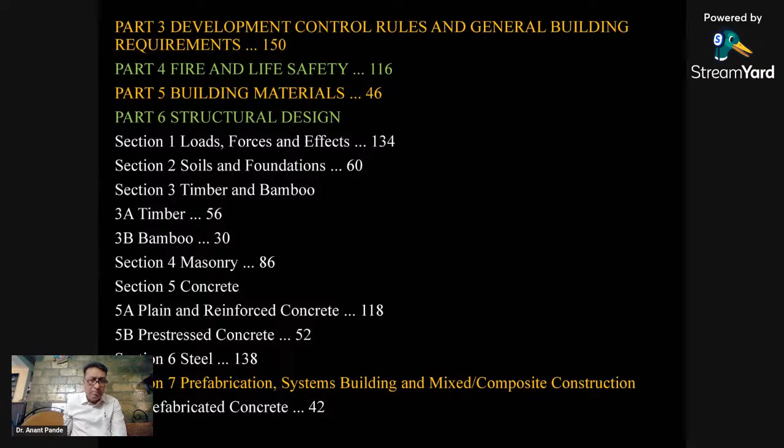So I'm just going through details. The next volume is volume 2, explanatory note for users of the code. This is what we are supposed to go into details of. Then only we can understand the codes very well. Construction management practices and safety, building services.

Services - probably you will have to refer to this: lighting, ventilation. So in one of the presentations, I made a presentation on sun path analysis. Probably it is not covered in any other code, though it is more related to architecture. But every engineer must understand what is sun path analysis, what is a green building.

All this has been covered in the National Building Code. Plumbing services, etc. - the details are available in National Building Code. Landscape development is also available. Part 11 is approach to sustainability. This is what we are focusing more on, and those who are interested, I'll request them to go into details of this part 11.

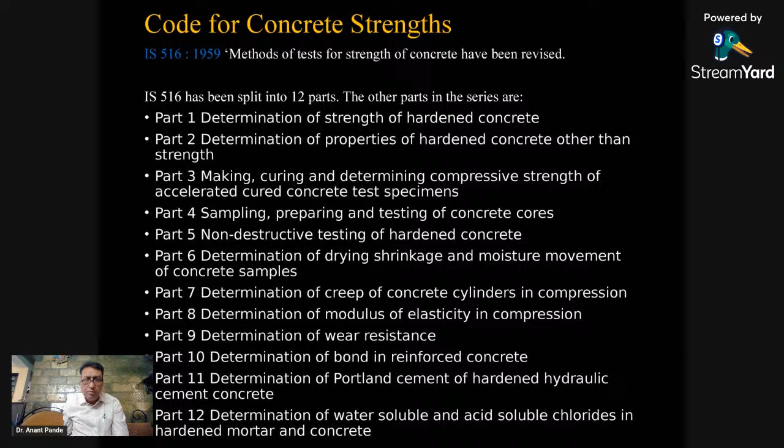So the original codes 13311, they are replaced by IS 516, that is part 5, section 1 to 4. Non-destructive testing provisions have been incorporated, but they have been modified. So those who are following 13311 part 1 and 2, there are great changes. Details on the frequencies of transducers have been updated. So again, if you are following the old codes, you will be put to trouble.

Then more details are included on surface preparation. Earlier the surface preparation was not very specific, though it was mentioned, but now they have brought in a better kind of option for surface preparation. Velocity criteria have also been revised, and more details have been given on the effect of various factors on pulse velocity measurements.

Those who have followed the earlier code - many times it so happened that your rebound hammer used to give good results, but your pulse velocity was not giving proper results. So if you follow IS 516 part 5, then you will understand this in a better way.

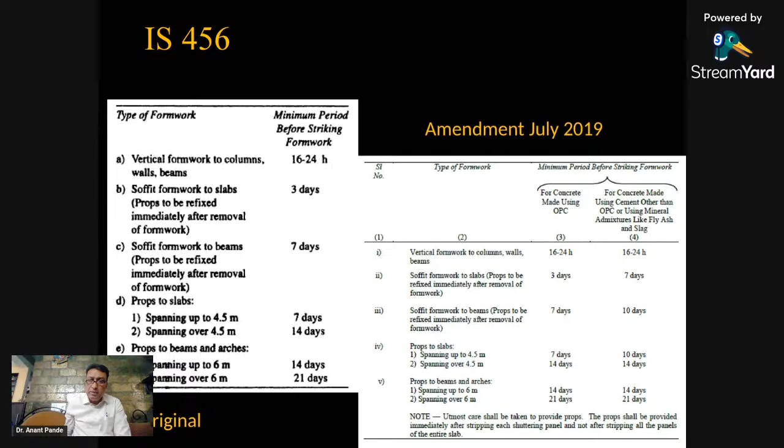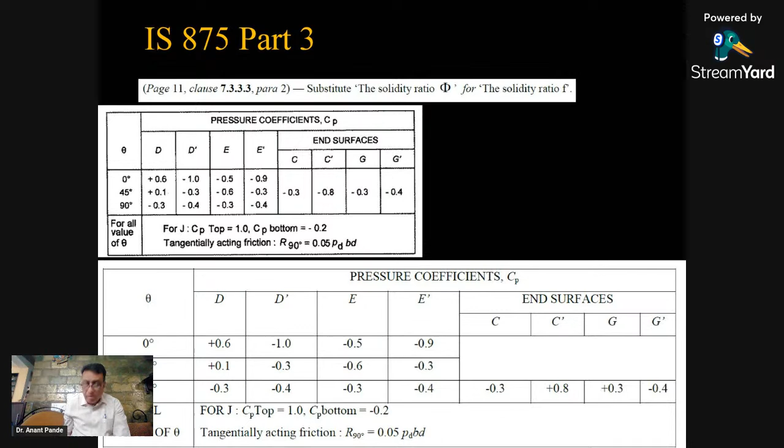So that's why I'm focusing on these amendments, only to make you aware that if you are following a particular code's older version, your calculations may prove to be wrong. This is a very classical example, IS 875 part 3, dynamic wind effects. If you have referred or used this any time, the formula in the earlier code, even as late as 2016, it has come.

You look at that, under root it is 1 plus g square. And of course I was a project guide, and there was a difficulty for my student. He said, Sir, for 1 plus g square, I have taken 9.8 as g, because g is 9.8 meters per second square. I said there must be some mistake. Why did I realize this? Because they have explained all symbols there itself, but this g was not explained.

So I went for the purchase of this code. At that time, I think this was not available online free of cost. And then in the amendment, I saw it is 1 plus phi square, and not 1 plus g square. Page 47, clause 10.2, line 28. And phi is a totally different factor to account for second order turbulence intensity, it has to be calculated differently. And if you are using 9.8 meters per second square instead of this factor, your calculations are going to be absolutely wrong.

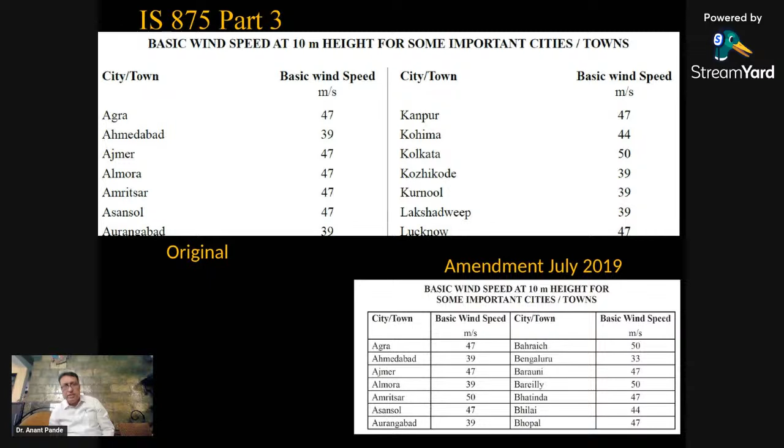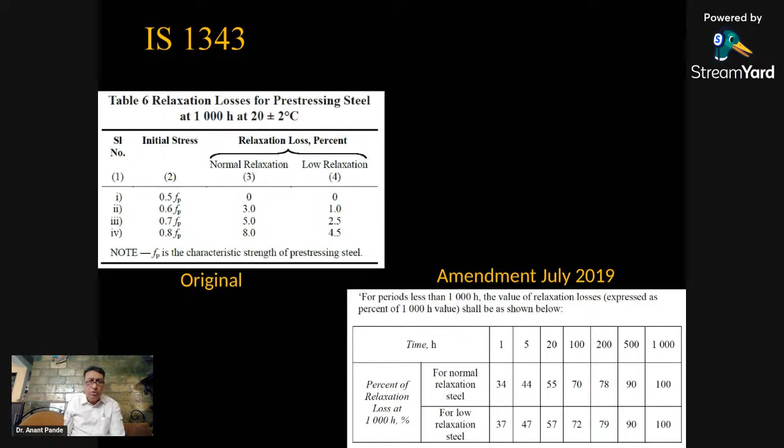And AW, which might have been calculated using earlier code, there is a great mistake. So focusing on all this, you have to remember that you have to follow amendments for every code, and you can get amendments easily, absolutely no issues.

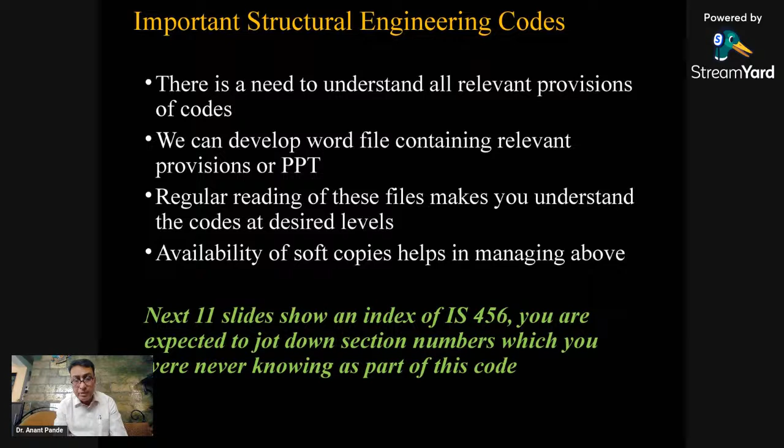Now, if I ask you, everybody knows IS 456. I don't have any doubt that you know IS 456. But while discussing with students and my colleagues many times, I realized that probably many of them were not aware about what are the contents of IS 456. Contents related to structural design, yes, everybody knows. But contents other than structural design are not known to many of these people. This was my observation. Probably your observation may be different.

See, IS 456, why I'm showing this is a simple thing. I want everybody, once you go for the latest version of the code or amendments, you should look at the index first. So materials, workmanship, inspection, and testing, material, cement, mineral admixture, aggregates, water, everything is available in 456.

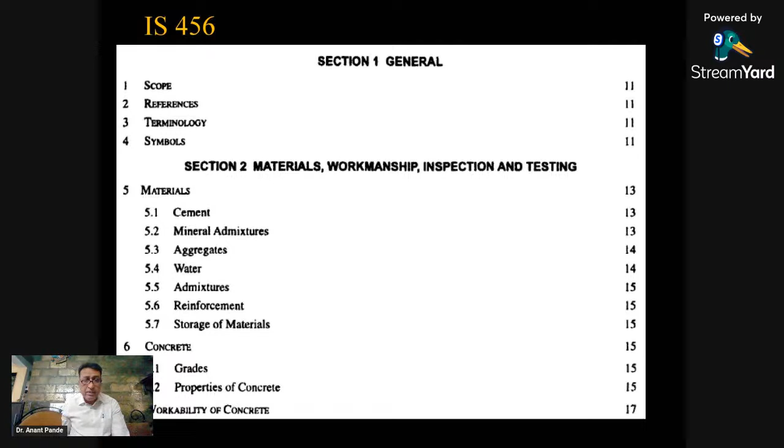Maybe, probably you will have to refer specific codes whenever it comes while directly using properties of concrete, workability of concrete, that is given in 456. Durability of concrete, requirements for durability, that is also given. Mix proportioning, of course, you will get basic information in 456 itself.

Production of concrete, quality assurance measures, batching, mixing, form work. Now, form work, that is also included in IS 456. These are general requirements. I'll be covering specific code related to form work, but even these are mentioned. Assembly of reinforcement, transportation, placing, compaction, and curing, etc. This is also given in IS 456.

Construction joints, cold joints, curing, supervision, concrete under special conditions, underwater concreting. So many times it so happens that when you are required, 456 is handy. But once you look at 456, you can get into touch with other relevant codes, because this code also mentions other codes, so you can get other codes also where underwater concreting, how it can be done.

Sampling strength of designed concrete mix, even that is mentioned over here. Inspection and testing of structure, of course, this needs revision because a new code has come, so that will be incorporated. But there is a mention about the standard in 456. You have to refer for the latest version of that code.

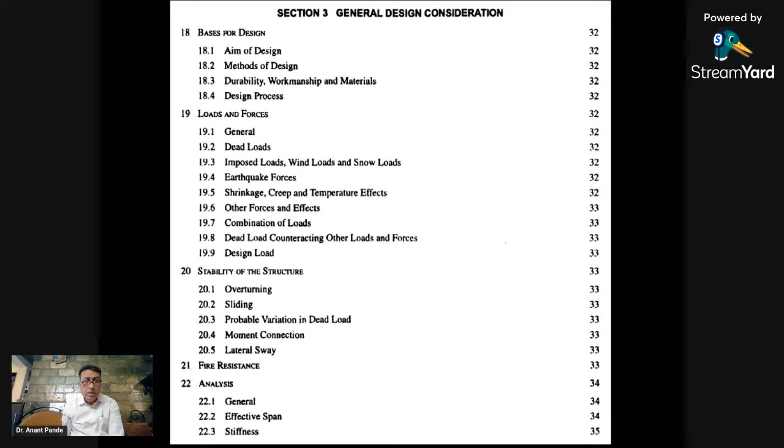This probably everybody knows, that is general design considerations. Most of the students and faculty, they follow this part. Stability of structures, that is also here. Fire resistance is there. Loads and forces, they are also given. A brief introduction is always there.

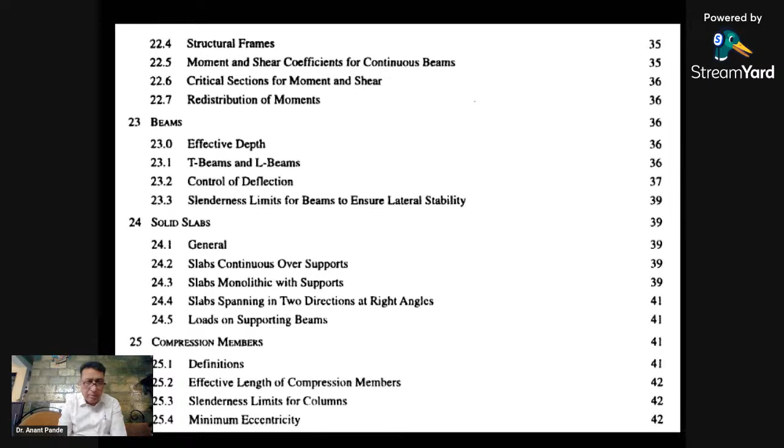Solid slabs, compression members, most of you might have referred to. Special design requirements for structural members and systems. Now, concrete corbels, deep beams, ribbed hollow block or voided slab, these are also given in 456. What you are supposed to do is just refer this, and whichever code is mentioned over there, you try to follow that code. That will help you in understanding these things. Flat slab, of course, those who design flat slab, it covers in this. Walls is also there.

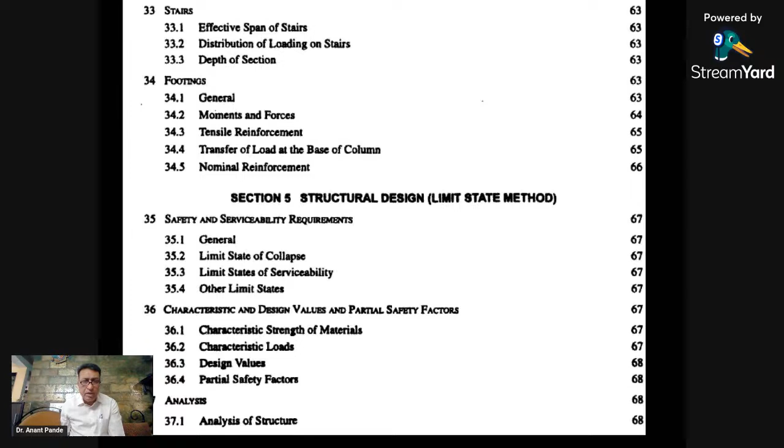Look at section 5, limit state method, that most of you who are teaching structural design or who have learned, they have followed this. So I'll not be speaking much on this, but I am just showing you this is the importance of the index of any code. So if you read the index carefully, you will get a lot of information.

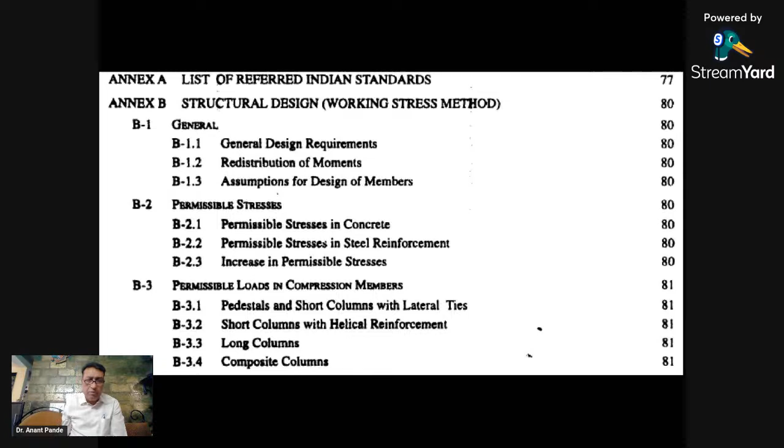So I'm just showing you calculation of deflection. Everything is given in 456. Now, foreword reading is also very important. See, any new version of code has come, you will have to refer to the foreword.

Unfortunately, what has happened is yesterday I uploaded my presentation, then in the evening I modified it for bringing some text. But since that was uploaded, it is opening the old one.

Remember, I want everyone sitting over here. I'm asking you to read all forewords because you will get a lot of information from the foreword. There is a code 3466. You can note down IS 3466. You can download that code and just look at foreword 0.2 section. It is part zero point 0.2 of IS 3466. Of course, it will be there in my presentation also. So we'll be focusing on that.

So unless you read the code carefully... I'll give you two or three minutes.

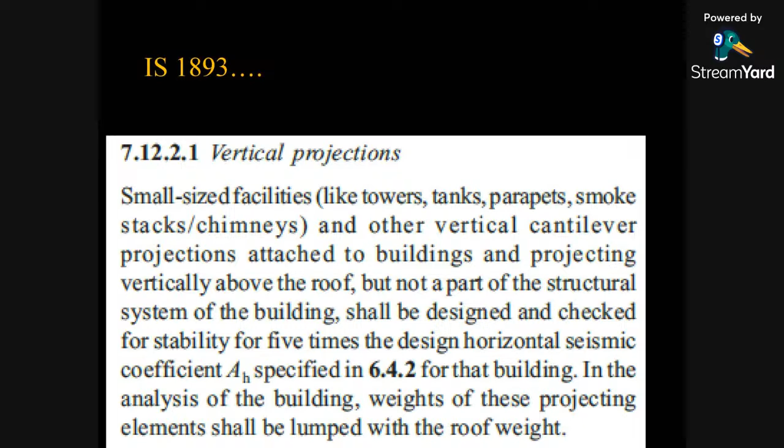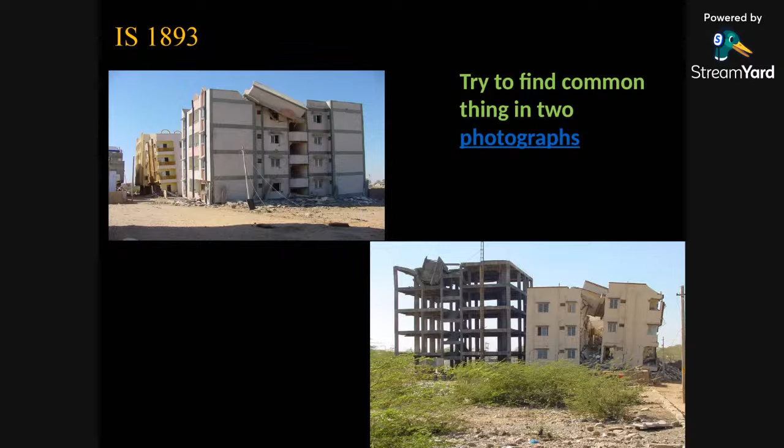So we have to understand all relevant clauses carefully. So when I look at 1893, it must be read along with IS 4326 and 13920. What is this 4326? Many will be surprised to know that 4326 has given some comments somewhere which are very relevant from an earthquake point of view.

Then excavations - even while traveling, with very recent times traveling with a structural designer, I could check that the excavation for tall structures. My comment was very simple: you have not followed IS 3764. So, 13920, 4326, then look at another code, 1904 - general requirements for design and construction of foundations in soils.

So I request the organizers, at the end of my presentation, I'd like to show you 3764 and the last part, that is worksheets.

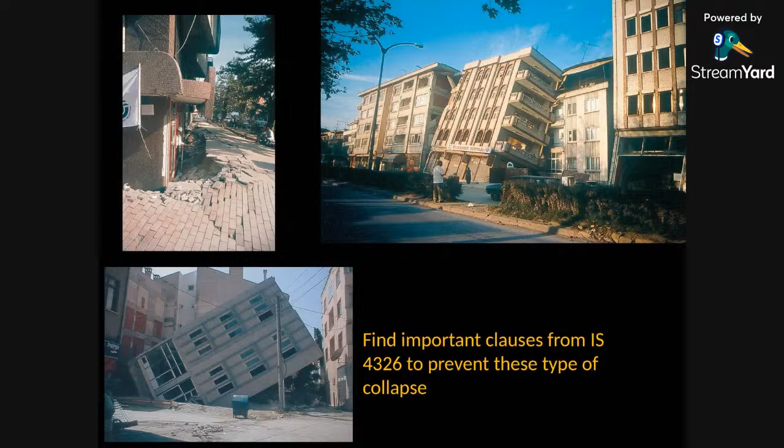Now there are three more photographs. The buildings have tilted; there is almost no major damage to them, but the buildings have become unusable. We cannot use these buildings because they have not followed important clauses of IS 4326.

At stilt level the stiffness is on the lower side, while upper floors have higher stiffness, and there are shaking horizontal movements. Because of that, the stiffness variation results in a major problem where the floor having lower stiffness collapses. So buildings are standing but cannot be used only because their ground floor has gone.

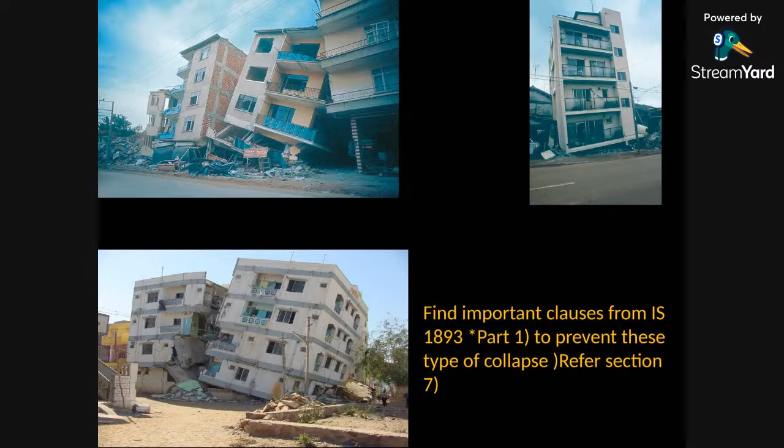So we have to remember, whenever you are studying IS 1893, try to see all relevant sections. You can keep a soft copy and highlight important text so that whenever you refer to the code, it becomes easier to see the provisions.

At the end of my presentation I will show you IS 3764 and IS 1904. I like to show this code because whenever I interact with many people, they have not referred to this code much. So just note down IS 3764 and IS 1904, and those who wish to learn something different should try to follow the important provisions of these codes.

Other important codes: 1343, many of you know; 3370 for water tanks; staging 11682; steel reinforcement 1786; false work for concrete structures 14687.

Now if you refer to this code and read it carefully, try to understand it, you will find there are some fallacies in code 14687. So those who are interested in understanding the codes, I request them to refer to or even read 14687.

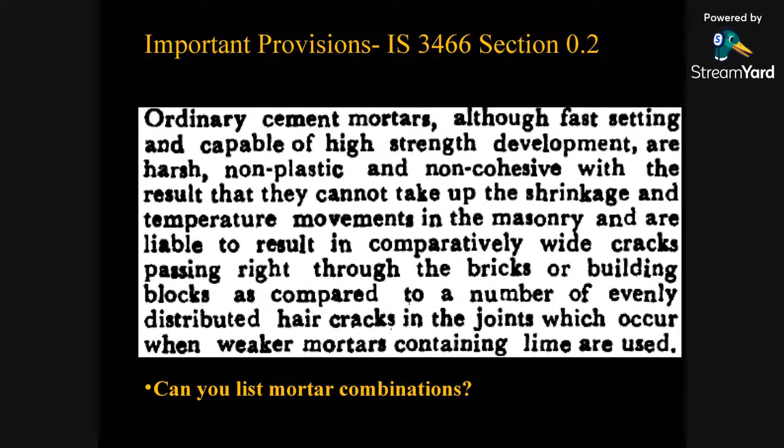Now the basic question is, in our rural areas, if you are getting bricks of 3.5 Newton per mm square, that is 35 kg per centimeter square that we normally use, what kind of mortar should we use? We should not use the same kind of mortar for the same type of masonry unit.

But if you look at these columns, cement, then lime, pozzolana mixture, sand is common, cement is common, or many times lime replaces cement. But there is lime pozzolana mixture, and this code is IS 4098.

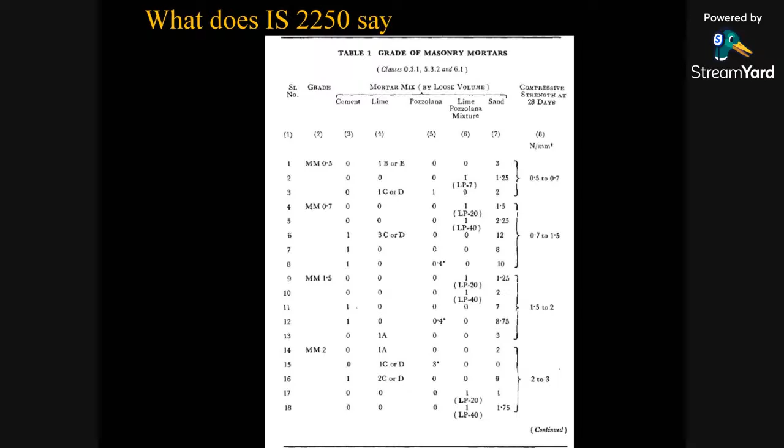And what cement we are using for masonry is PPC. Nowadays PPC has a strength of 53 Newton per mm square or more. Now just look at it. I'll go to the next slide and then we'll discuss this.

Now, what is the highest grade of your masonry mortar? It is MM 7.5. The code says the compressive strength is 7.5 Newton per mm square. Now, just look at this. We are not required to use mortar having strength more than 7.5 Newton per mm square.

Why? Because if you use this high cement kind of mortar mixes, they are liable for cracks, shrinkage cracks, and that renders the masonry weak, on the lower side. The strength is on the lower side. There are leakage problems, efflorescence, and many things.

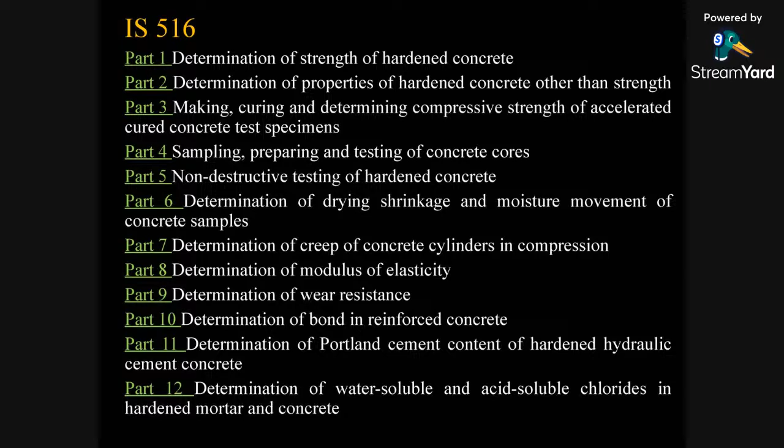For codes on bricks and blocks: 1077 is common burnt clay bricks, and 3495 part 1 to 5. This is one which those interested in working on masonry, and those who haven't so far worked on projects involving masonry units, should focus on. 3495 gives simple tests on burnt clay bricks, including dimensions and other details. So I want you to go into the details of 3495.

12894 is for pulverized fuel ash lime bricks, the Fal-G bricks. We are getting these bricks in Nagpur, manufactured as per 12894. Concrete masonry units are covered in four parts under 2185.

Chemical resistant mortar is 4832. Precast concrete stone masonry blocks is 12440. Grouting materials for alluvial grouting is 14343. 15658 is for paving blocks, and 3812 is pulverized fuel ash, which comes in two parts, 1 and 2. So those using fly ash must understand 3812, as well as the testing code, which is 1727.

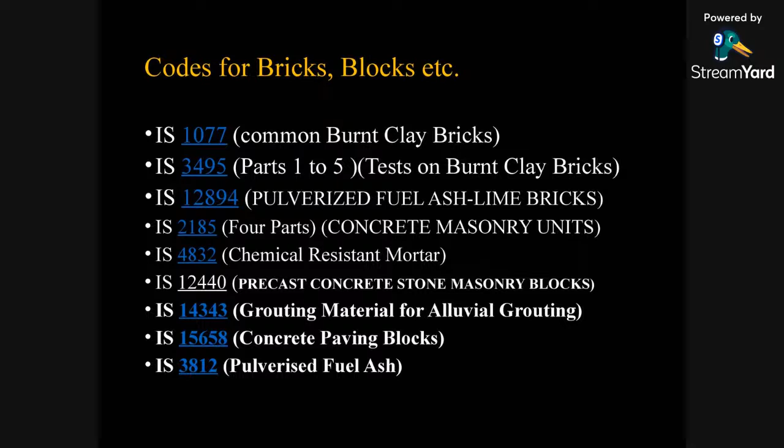How can you get any code? You simply register on the BIS website, log in, and you can download any code, including special publications. This course, those who have not used it, you are expected to use it for personal purposes, not for commercial use. Anybody can get the code, download it, try to create your own bank, and look for amendments, whatever you want. Search within one code for relevant other codes and try to get those codes.

If you can work on this course and master it, you will be a good advisor to many.

So my request to all of you is to choose any three structural engineering related IS codes, compile information on a minimum of 10 important clauses, then do the same for civil engineering materials related codes. If you follow this, you will understand the system and the importance of this.

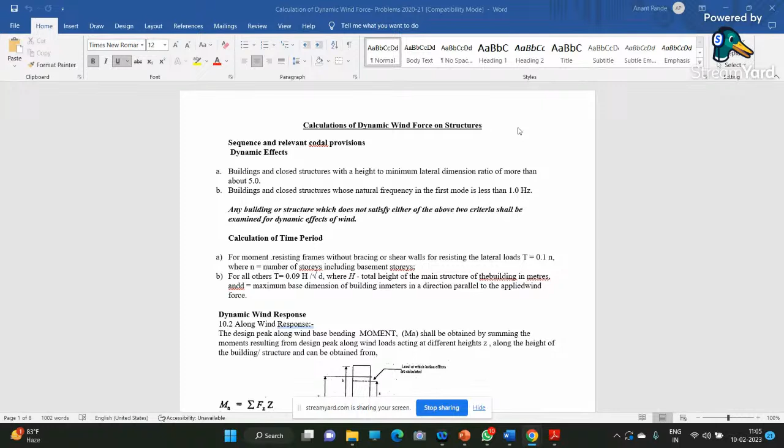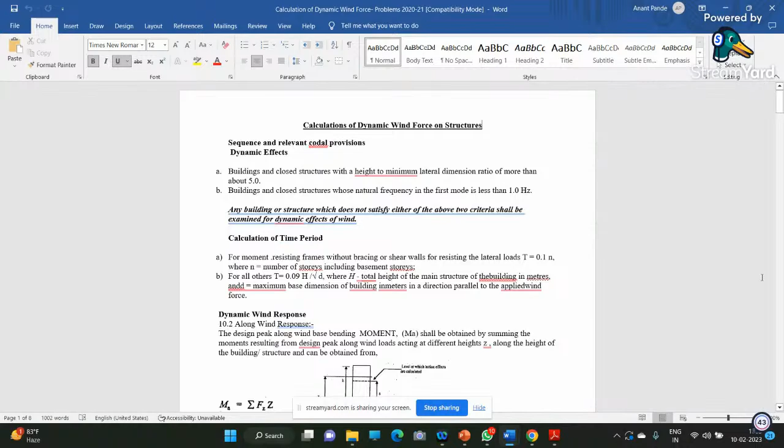You can see this calculation of dynamic wind force. Yes sir, okay. One minute sir, but it is not that clear, sir. I think you should zoom it a little bit. Okay. Yes sir, now it is visible.

Now, this is what I was telling you, to understand the critical provisions of the code and calculations of dynamic wind force on structures, which is a complicated kind of thing. So what is the first step? Try to understand the important codal provisions and jot them down. In sequence: buildings and closed structures with height to minimum lateral dimension ratio more than 0.5, 5.0, etc. Try to understand. The second line is buildings and closed structures whose natural frequency in the first mode is less than 1 hertz. This indicates that any building more than 10 stories will be required to check dynamic wind effects.

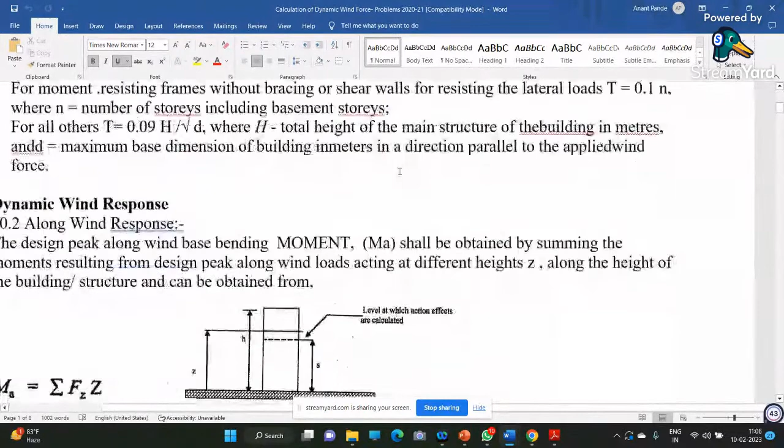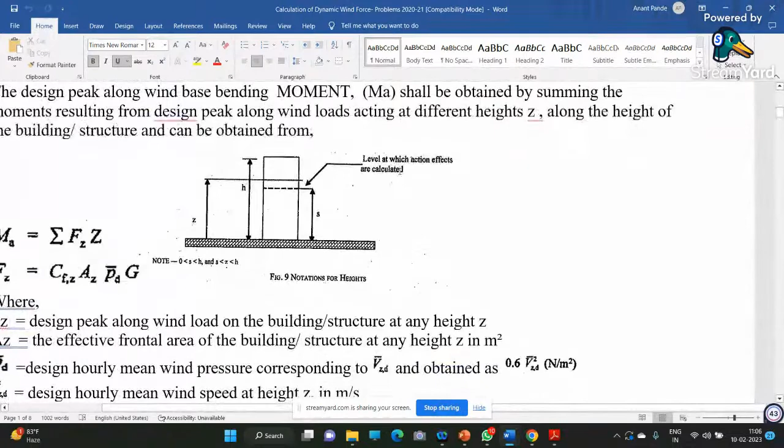So it is better you write down all formulae first, all codal provisions, taking them from the code and putting them here so that you are arranging them in logical sequence. I'm not going into details of the things, I'm just explaining the system in which we work. Now when it comes to the Gust factor, the formula I have written, whatever the formulae and page numbers in that code, you try to mention. If you mention these things, you will easily grasp these codes.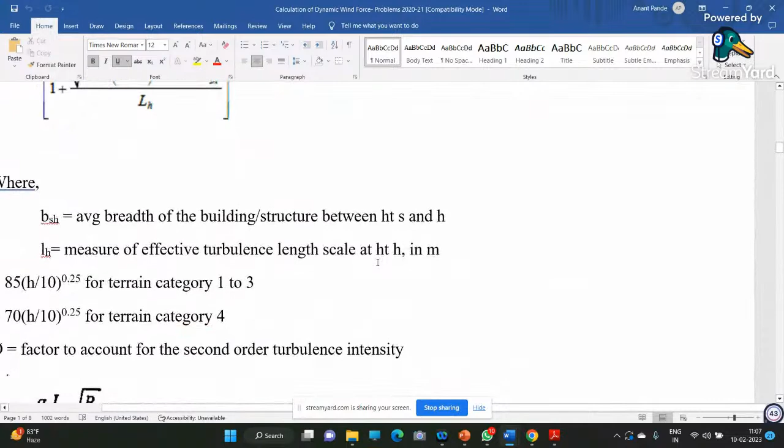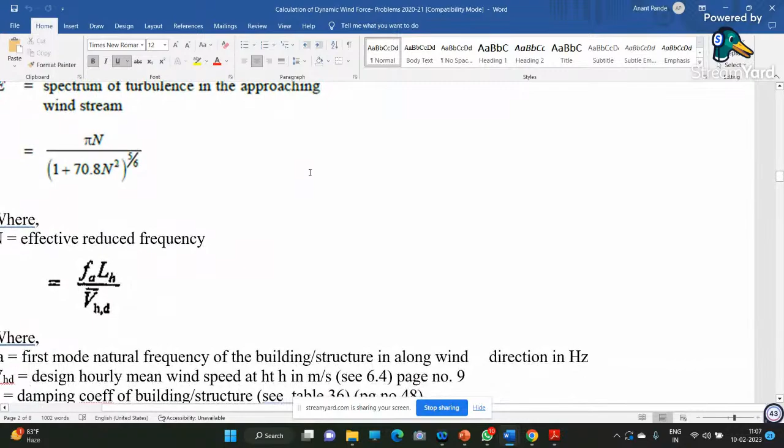This is given in the code, and the amendment, whatever is given, I am highlighting. So all important formulae from various pages, I am just putting together. Just look at it, you are not supposed to understand everything right now, it is the system you can very well follow. All formulae related to that I am putting at one point, and I'll be using these formulae for further calculations.

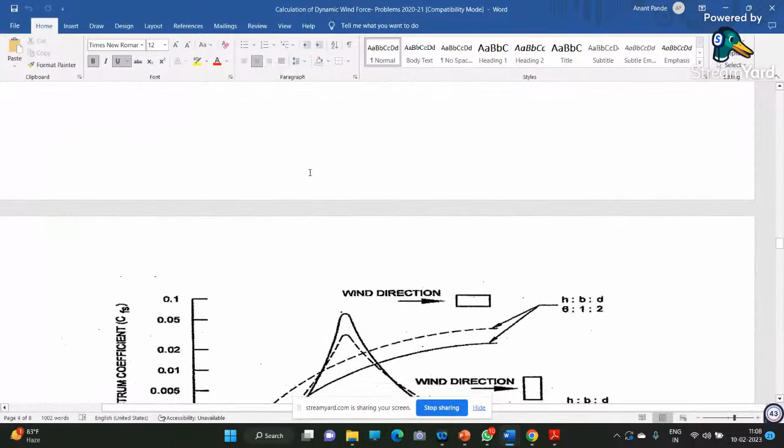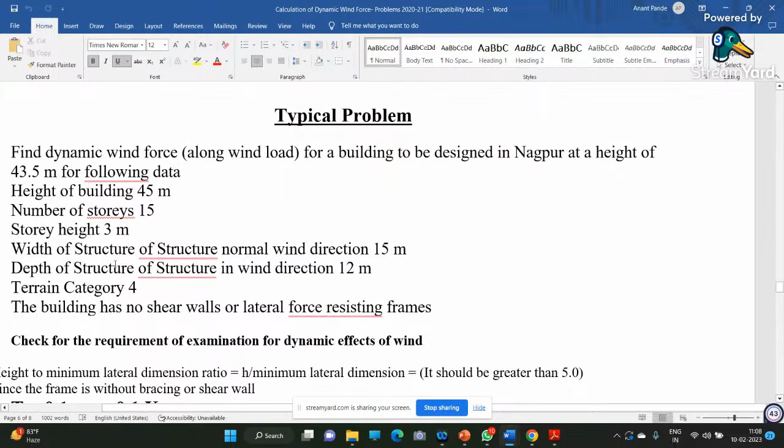See, it looks to be very complicated. There are many formulae, and the formulae are very complicated. You have to understand everything, calculate the things, take it from graph and many things. So this is a typical problem you have to take, and you have to take height of building, something more than 50. If you wish to work on this, you get the things, then start calculating everything.

Whatever I have mentioned earlier, codal provisions in logical sequence I have written, and based on that logical sequence we can work out in the sheet.

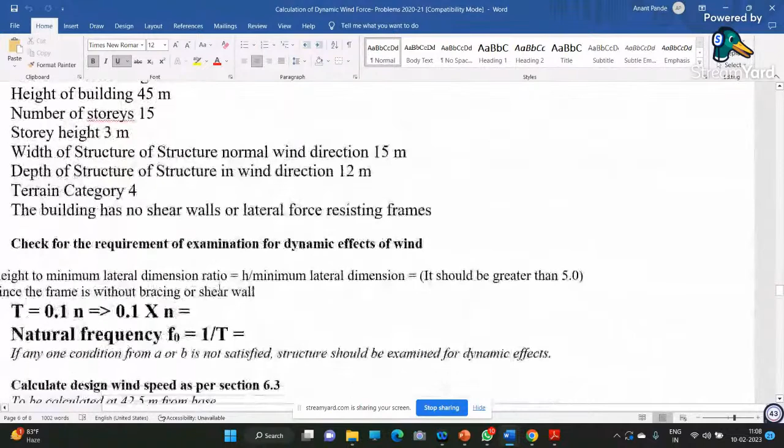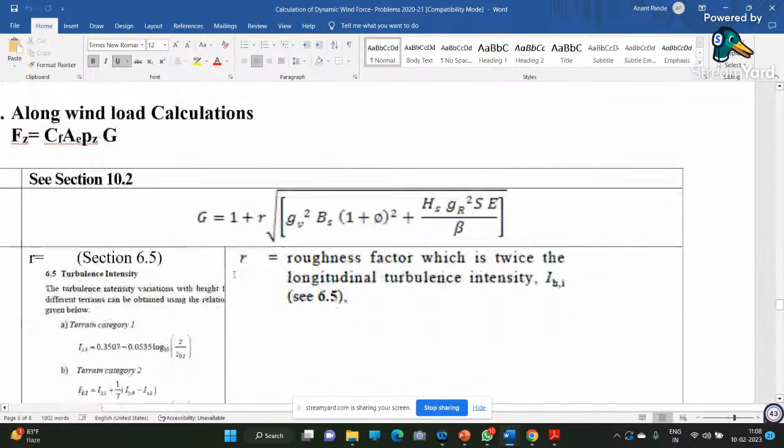This is first. Then whatever is next, this is the formula. But for this formula, we have to calculate many things. So whatever is required, calculate IZ, calculate R, whatever it is. So any problem you take, even design problem or analysis problem, whatever you want, you write down the codal provisions systematically and prepare a worksheet. This is a worksheet.

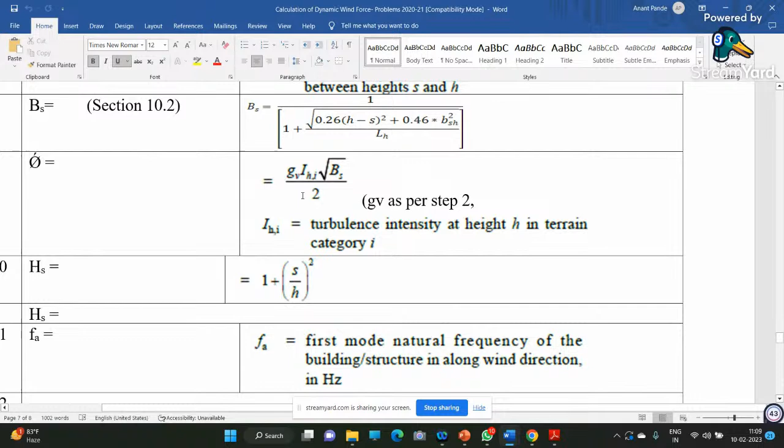So once you calculate everything, see why what I was telling is the logical sequence of the formulae. In some cases, the formulae are given first, and then you have to calculate many factors based on that, and then incorporate them in this. So what I have done is written the formulae, but later on calculated it, so what is required in the formulae.

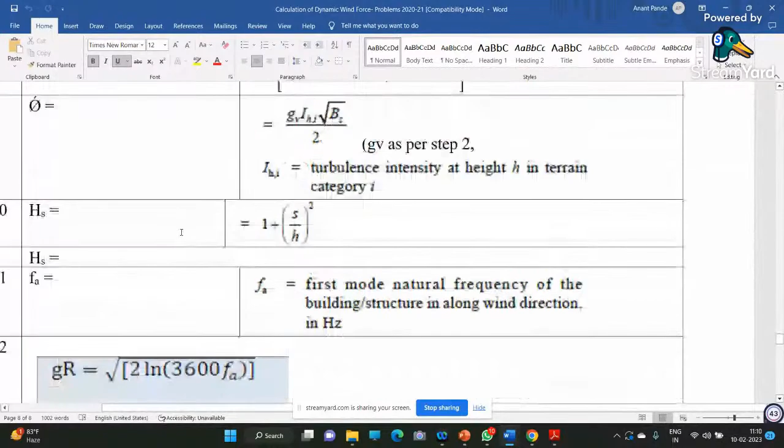This is how it is, see, it is complicated, but finally you can calculate this. If you can calculate this, then you can very well even use Excel for calculating this for various conditions. So this is one thing I wanted to show you, that for any complicated thing in the code, you try to prepare a worksheet where you write the formula and calculate the things. If you follow this system, you will understand codal provisions. So my aim to show this was just how you can master the codal provisions.

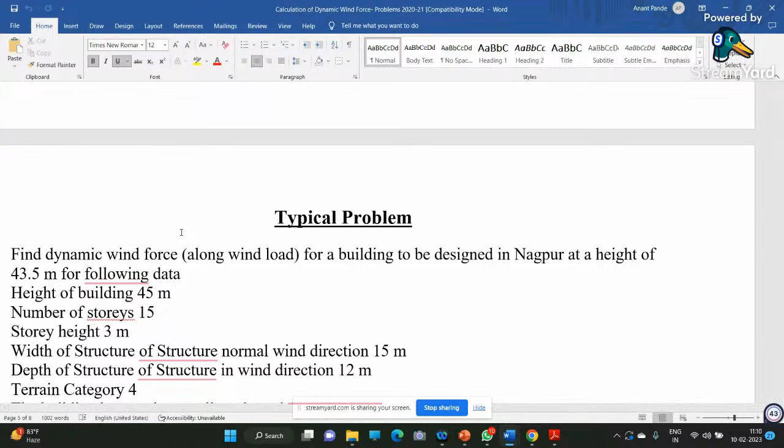This is that. I will now show you some more codes.

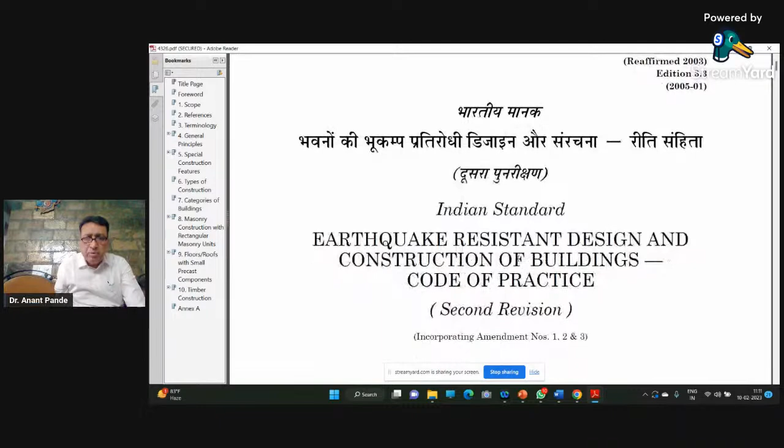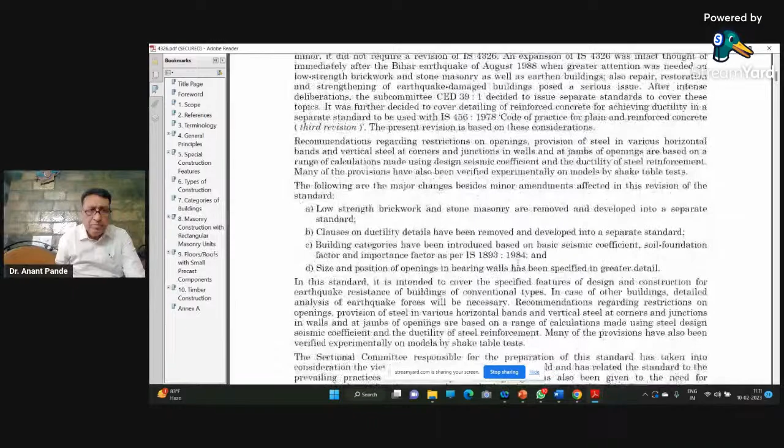4326. Can you see the code now? 4326. Hello, can you see the code? Yes sir, yes sir. This is very important. Earthquake resistant design and construction of buildings, this code of practice, everybody should read. What are the changes and other things.

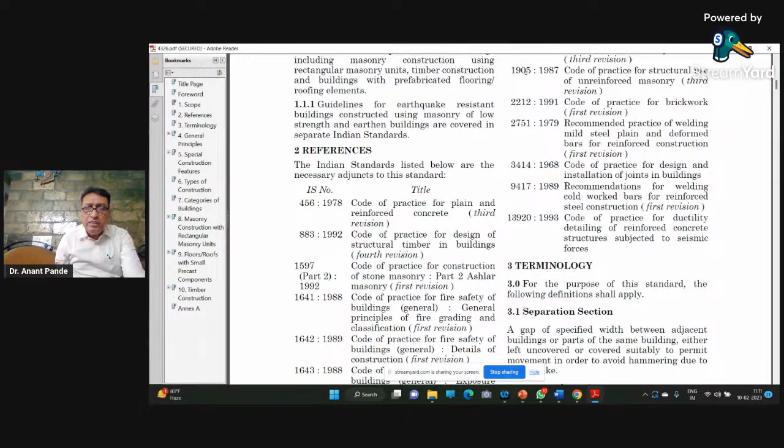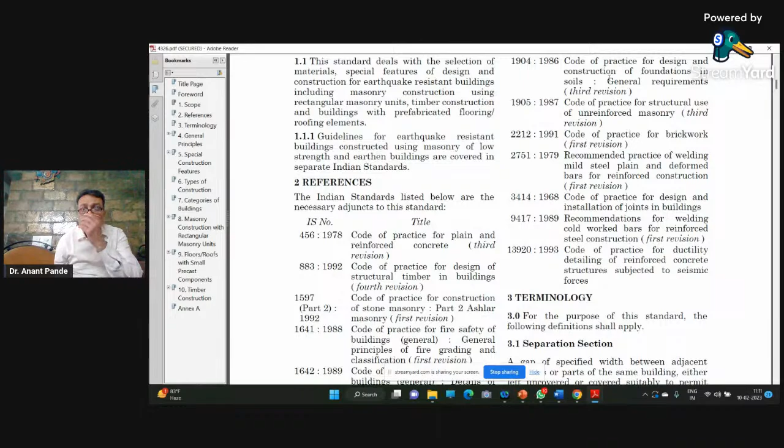Definitions are there, references. What I am saying is references. Here, reference is given as 456 1978, so you should go for the latest version of the code along with amendments. So if you try to download all these relevant codes, the 1904 code has also come, 1905 code has also come, this is masonry. Code of practice for design and construction of foundation, it has come.

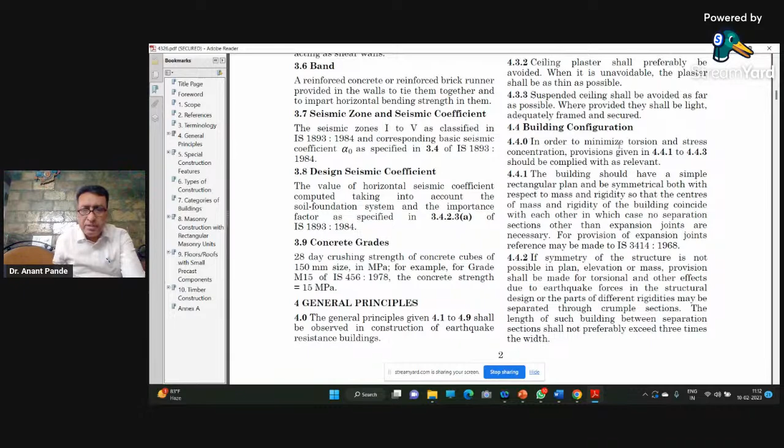Center of rigidity has come. Projecting and suspended parts, it is mentioned clearly. It has also mentioned about building configuration. See, for 30 plus stories onwards, we have to have the configuration. Those who have heard, it is frame, then tube in tube, bundle tube, frame tube. There are many such configurations that you can very well follow.

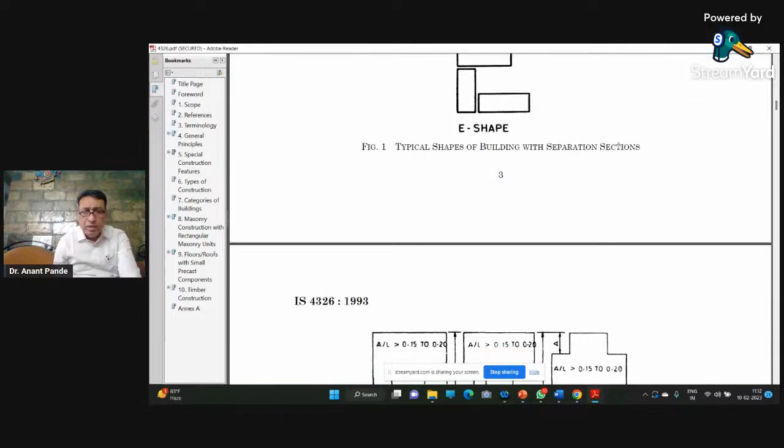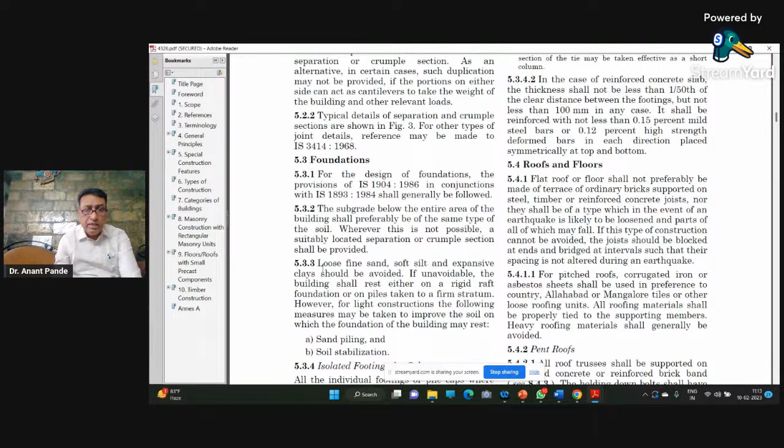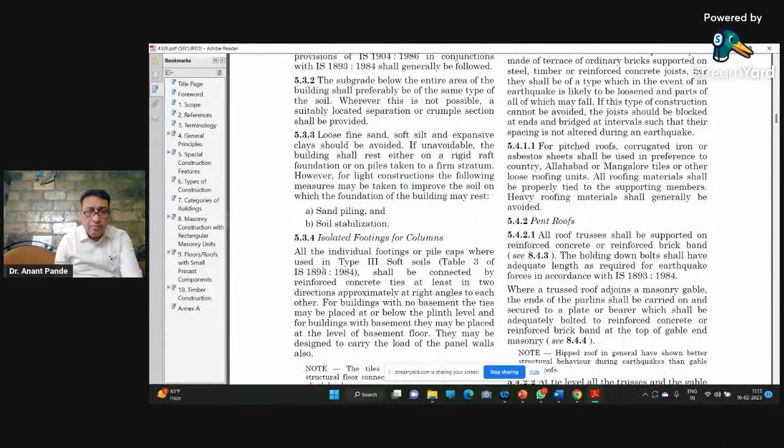Foundations, I'll show you only one clause. Ductility, it has mentioned. See, some of the things in this code are not referred in 1893. For foundations, in clause 5.3.3, loose and fine sand, soft silt, expansive clay should be avoided. If unavoidable, the building shall rest either on a rigid raft or foundation, etc. So about foundation, this is very clearly mentioned. And there is a term related to...

So this is one code which I wanted to show. Then 4326, 4926, I wanted to show you.

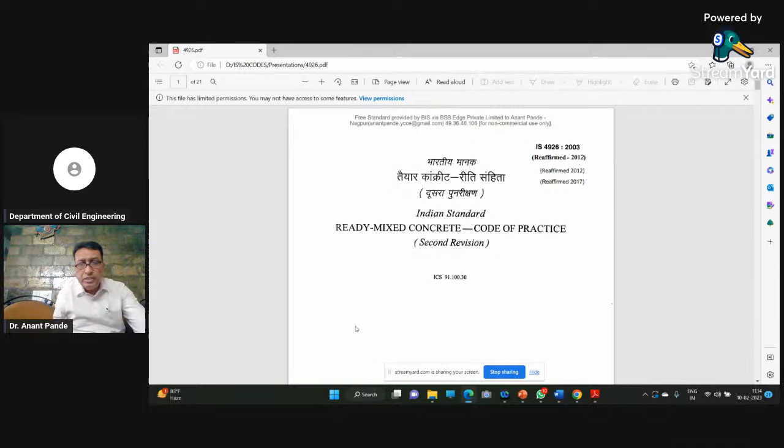This is 4926. Can you see this code? Yes sir, can you see the code? Yeah. 4926 is very important. Let me expand it a little.

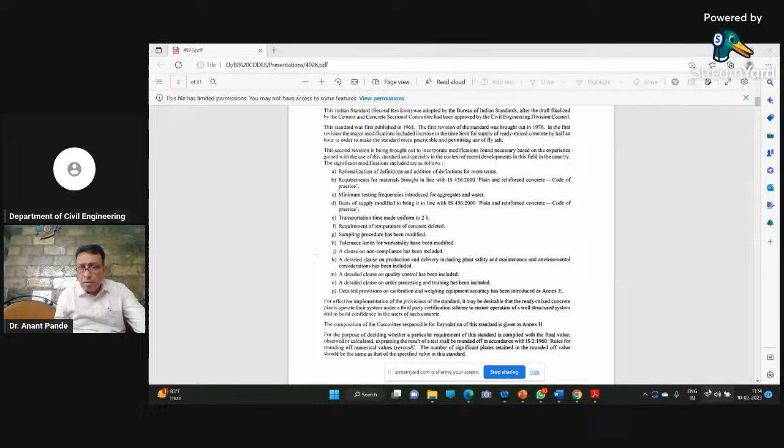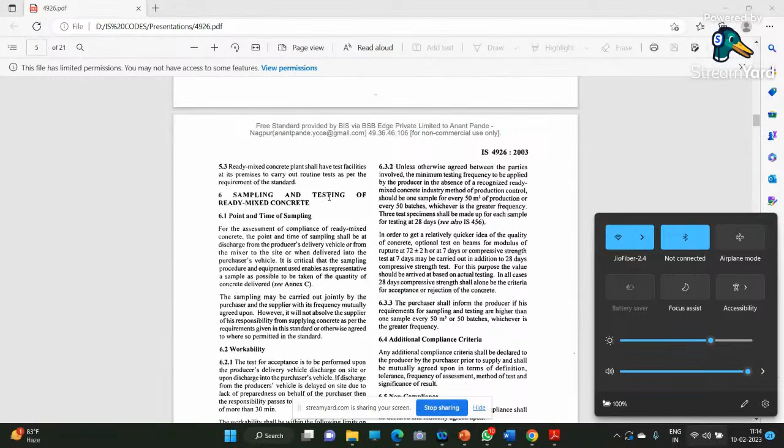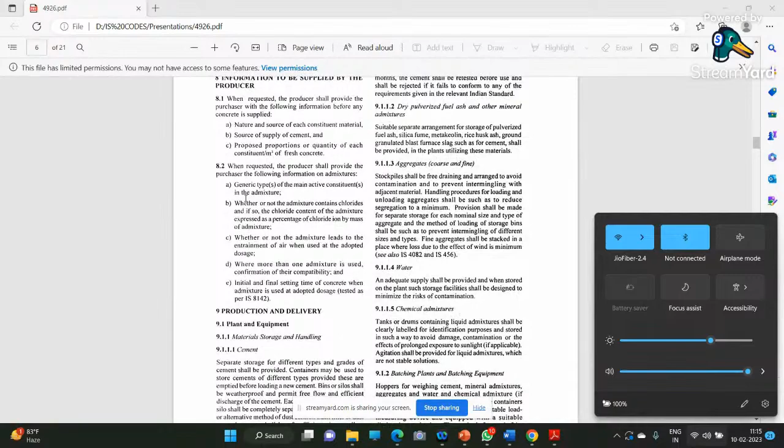Ready mix concrete, general requirements, basis of supply. Transport of concrete, time in transport, sampling and testing of ready-mix concrete, workability, compliance criteria. Now this is very important. Information to be supplied by the purchaser, information to be supplied by the producer, production and delivery.

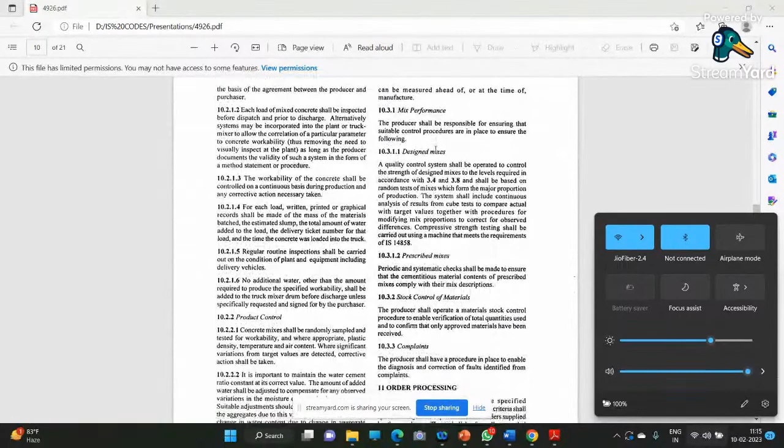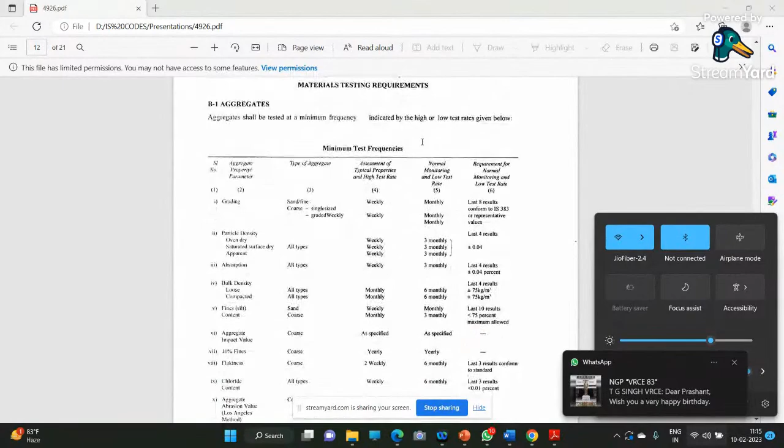Even plant, office building, etc., that they have covered. Quality control is there, order processing, even that is covered. Training is part of this RMC code, and there are some more details. Even this is important, concrete mix information to be supplied by the purchaser. There is a pro forma.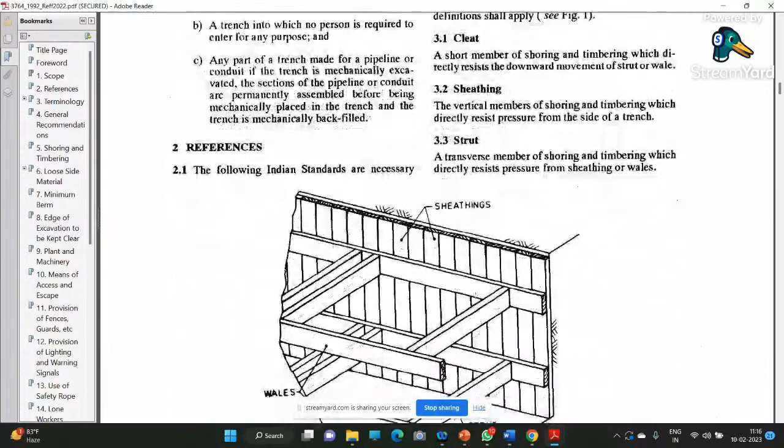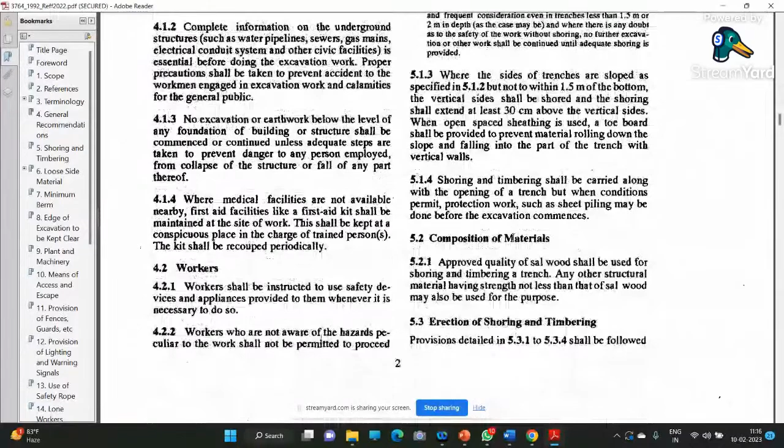This is what I wanted to show you - the Excavation Work Code of Safety. Terminologies are very clearly mentioned, along with general recommendations, shoring and timbering, sheet piling, and inspection and examination.

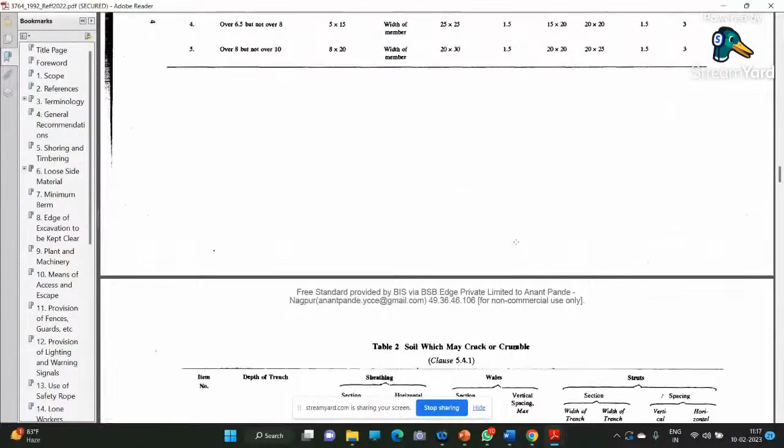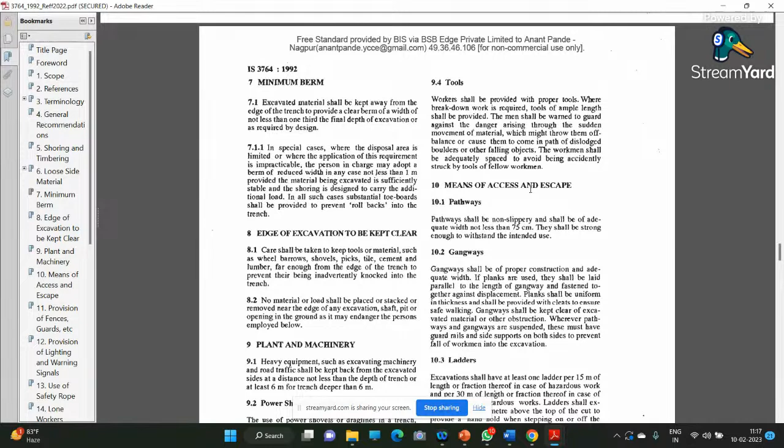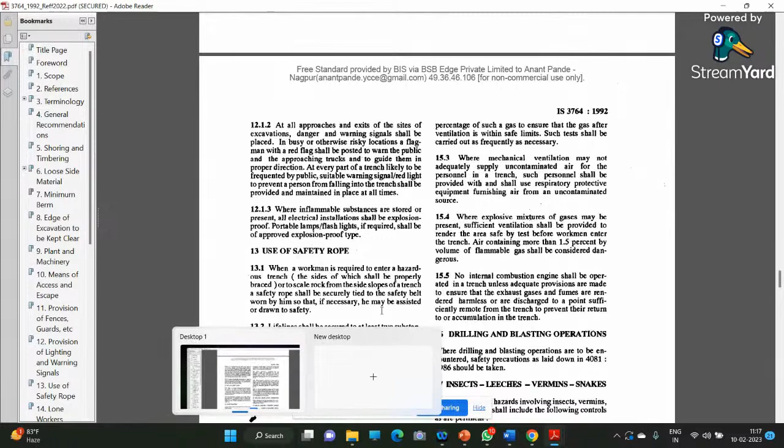Excavation is clearly mentioned, but I'll also show you some things like how loose side material is to be dealt with, means of access and escape. So when excavating for a building, there should be pathways, gangways, ladders, provisions of fences, guards, lighting and warning signals, and safety rope for lone workers - if a single person is working there, what provisions should be made for them.

All these things are mentioned in this 3764 code. So this is another code which I wanted you to see.

This is code 1904. I like this code because it covers general requirements for design and construction of foundations in soil, code of practice 1904.

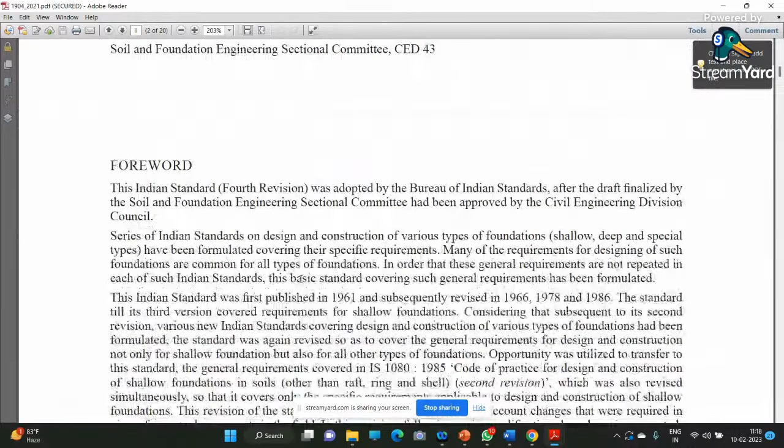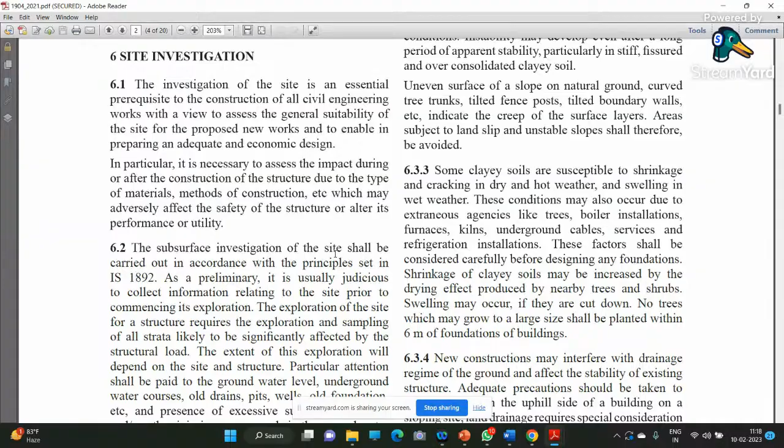Site investigation - when it comes to site investigation, there is code 1892. I'll show you this code also, how detailed they have carried out the things.

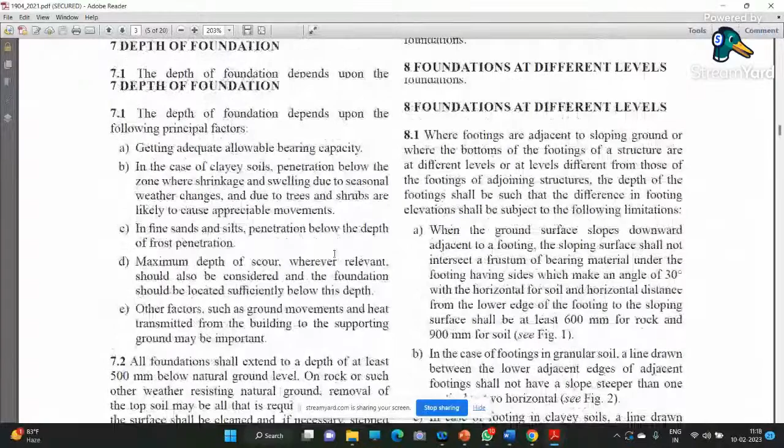The purpose of showing you all this is to make you aware of various codes. These surfaces should not intersect. When it is on sloping ground, what precautions are to be taken - that is also mentioned.

Seasonal weather changes, landslide prone areas - see, what happens is many of these things are not normally taught in class, so we can skip those things.

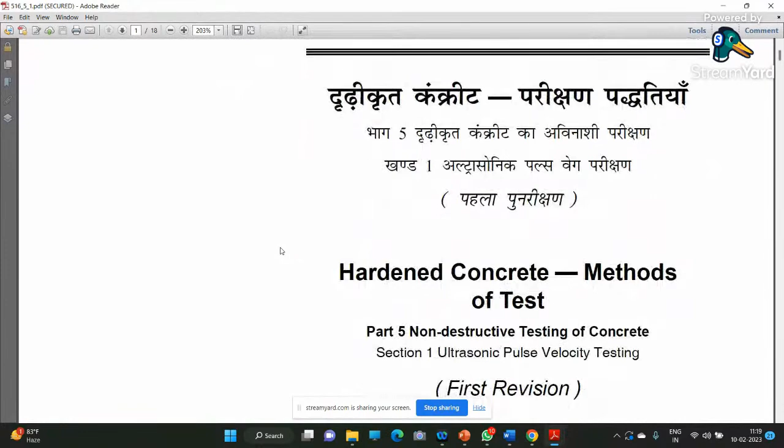Hardened concrete test, non-destructive testing of concrete. The first thing I want is, if you refer to this, read the foreword - what details have they incorporated? Full details are given.

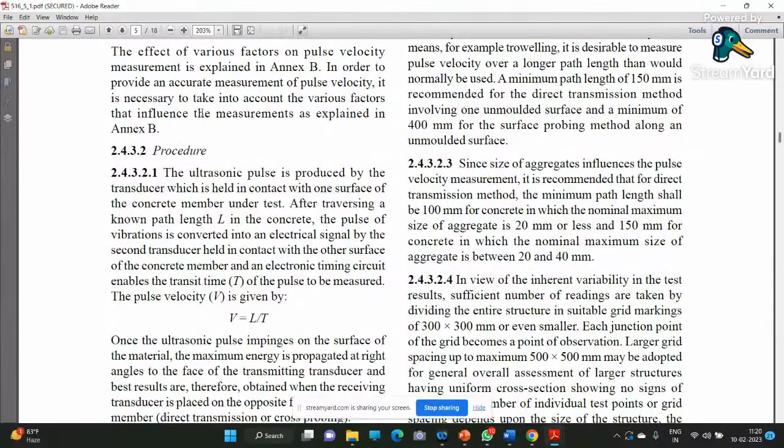In the earlier code, there was even statistical analysis, but that code is also withdrawn. So there was difficulty in knowing which readings we must keep. So you can see many modifications in this code.

I'd like to show you 1892. Let me check. This is 11682.

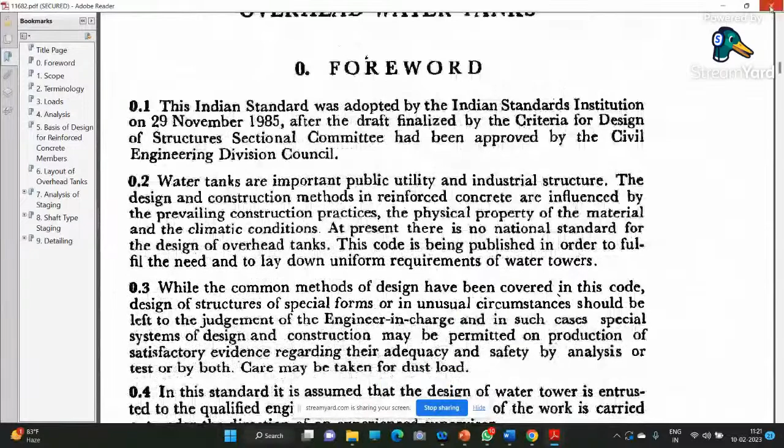Criteria for design of RCC staging for overhead water tanks. This I want those who are working on water tanks to see. I have seen some projects in which they have very well designed the structure, that is the water tank, but the staging was not designed as per the provisions of this code.

One more thing - I think I could show you many codes, 1892 somewhere. To conclude, what I feel is, the uncommon codes, I want you to go through them and try to understand them, specifically try to understand the amendments, and for any complicated kind of thing, try to develop worksheets so that it will be easier for you to understand the codes.

So for the last 5-6 minutes, I'd like to take any input or queries you have. You can ask me, you can raise the query so that I can answer your questions.